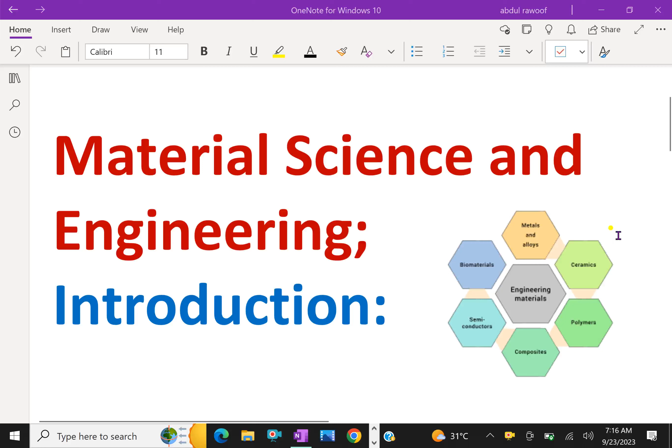In material science and engineering, let us do some introduction. Please take a few moments and reflect on what your life would be like without all of the materials that exist in our modern world. Believe it or not, without these materials, we won't have automobiles, cell phones, computers, internet, aeroplanes, ships, home appliances, furniture, stylish clothes, nutritious food, refrigerators, television, computers, etc. The list goes on continuously.

That's all we need. Virtually every segment of our everyday lives is influenced to one degree or another by materials. Without them, our existence would be much like that of our Stone Age ancestors. In the modern age, these are the very important materials that we need in day-to-day life.

Historically, the development and advancement of societies have been intimately tied to the members' ability to produce and manipulate materials to fill their needs. In fact, early civilizations have been designated by the level of their materials development, that is the Stone Age, Bronze Age, Iron Age.

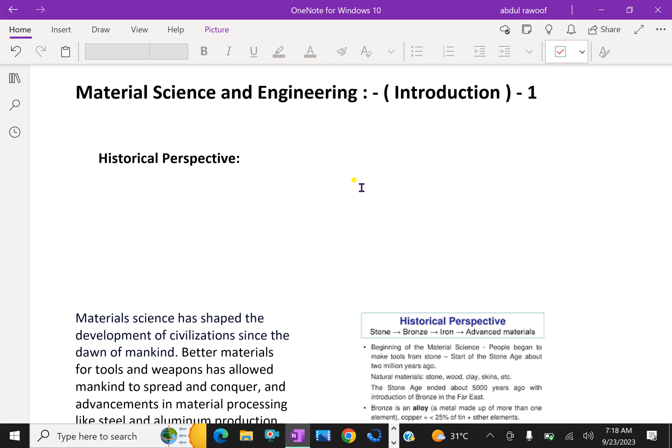Materials science has shaped the development of civilization since the dawn of mankind. Better materials for tools and weapons have allowed mankind to spread and conquer, and advancements in material processing like steel and aluminum production continue to impact society today.

The earliest humans had access to only a very limited number of materials, those that occur naturally: stone, wood, clay, skins, and so on. With time, they discovered techniques for producing materials that had properties superior to those of the natural ones. These new materials included pottery and various metals.

Furthermore, it was discovered that the properties of materials could be altered by heat treatments and by the addition of other substances to improve durability. At this point, materials utilization was totally a selection process that involved deciding from a given, rather limited set of materials the one best suited for an application by virtue of its characteristics.

The development of many technologies that make our existence so comfortable has been intimately associated with the accessibility of suitable materials. An advancement in the understanding of a material type is often the forerunner to the stepwise progression of technology. For example, automobiles would not have been possible without the availability of inexpensive steel or some other comparable substitute.

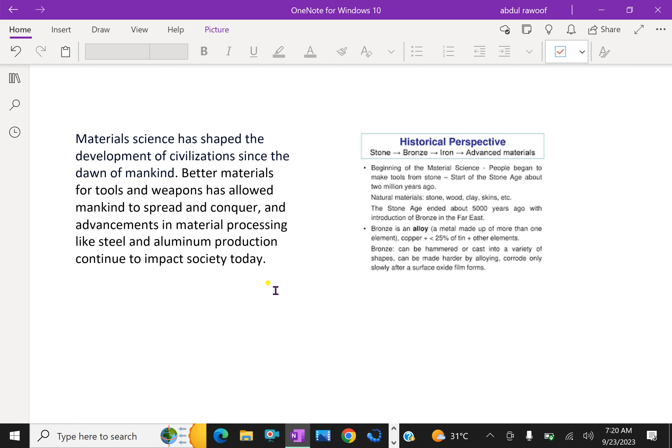Material science and engineering: why we need it. Sometimes it is useful to subdivide the discipline of material science and engineering into material science and material engineering subdisciplines also. Now, before that, we have to study the material structure, some introduction.

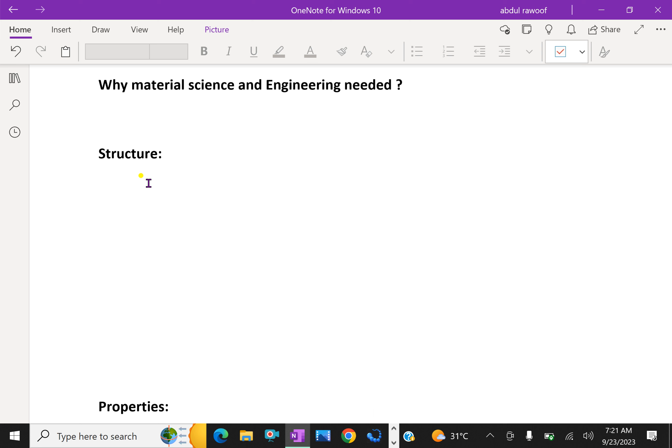In brief, the structure of a material usually relates to the arrangement of its internal components. Structural elements may be classified on the basis of size, and in this regard there are several levels. Subatomic structure: from this point of view, it involves electrons within the individual atoms, their energies, and interaction with the nuclei.

Next, atomic structure. It deals with the organization of atoms to yield molecules or crystals. Nanostructure. What is nanostructure? It deals with aggregates of atoms that form particles, that is nanoparticles, that have nanoscale dimensions less than about 100 nanometers.

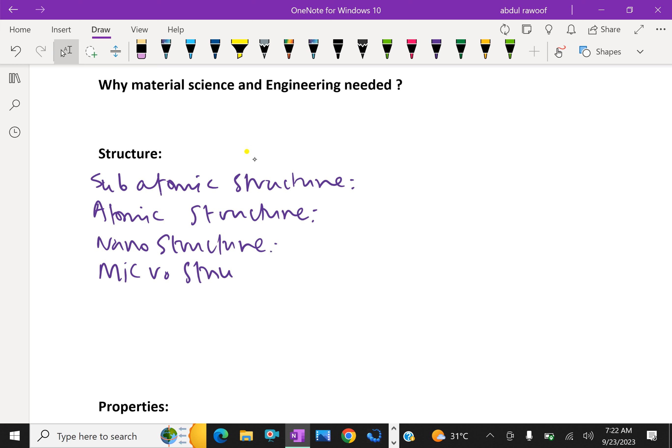Next is microstructure: those structural elements that are subject to direct observation using some type of microscope, structural features having dimensions between 100 nanometers and several millimeters. These are microstructures. Next is macrostructure.

Structural elements that may be viewed with the naked eye, with scale range between several millimeters to the order of meters, that is millimeters to meter sizes. Now, nano is less than 100. Nanostructure is less than 100 nanometers.

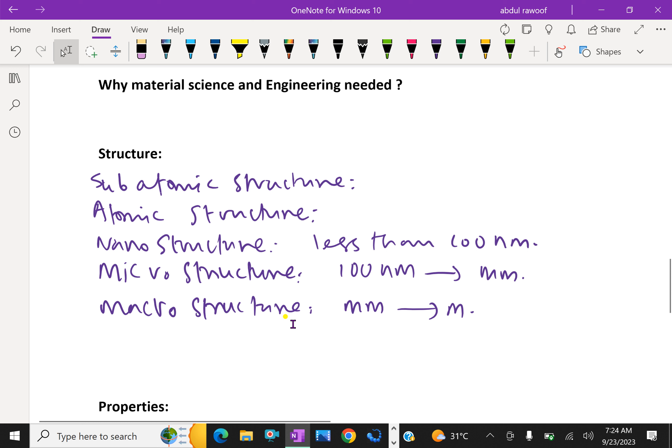Virtually all important properties of solid materials may be grouped into different categories: mechanical, electrical, thermal, magnetic, optical, and some branches. For each, there is a characteristic type of stimulus capable of provoking different responses. First is mechanical properties, which relates deformation to an applied load or force. For example, these include elastic modulus, stiffness, strength, and resistance to fracture of the material.

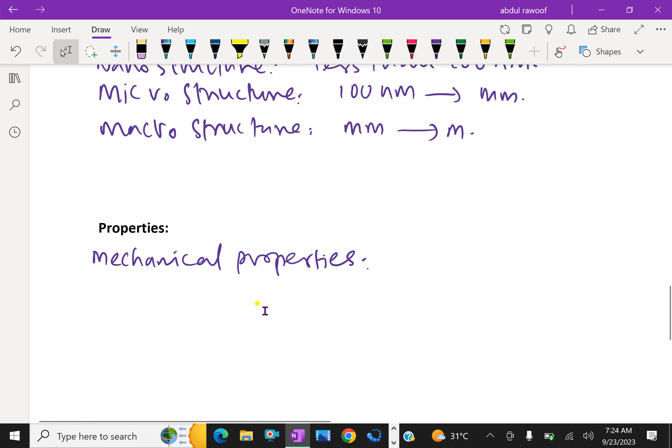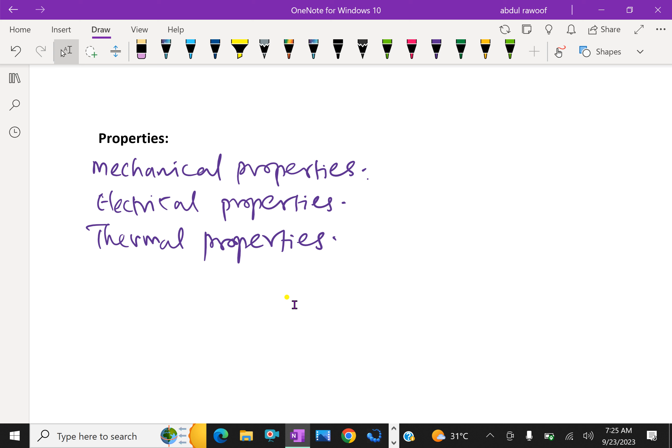That deals with mechanical properties. Next is electrical properties, where the stimulus is an applied electric field; typical properties include electrical conductivity and dielectric constants. It deals with electrical properties of the material. Next is thermal properties, which are related to changes in temperature or temperature gradients across a material. For example, thermal behavior includes thermal expansion and heat capacity of the material.

Magnetic properties: the response of a material to the application of a magnetic field. Common magnetic properties include magnetic susceptibility and magnetization, which deal with magnetic properties of the material. Next is optical properties. The stimulus is electromagnetic or light radiation; index of refraction and reflectivity are representative optical properties of the material.

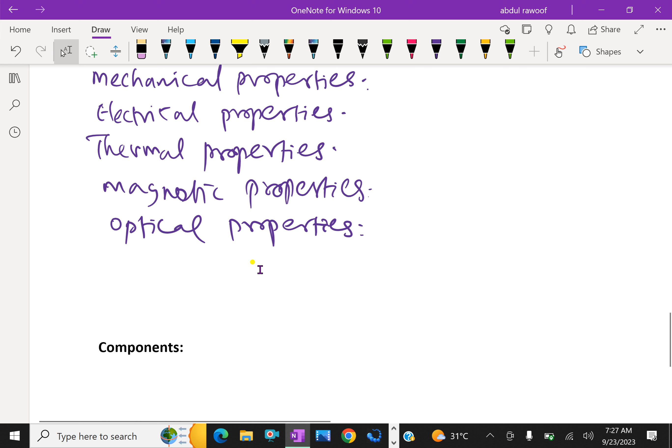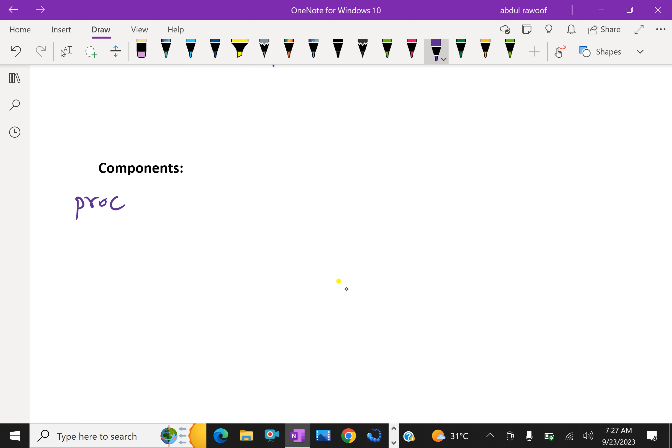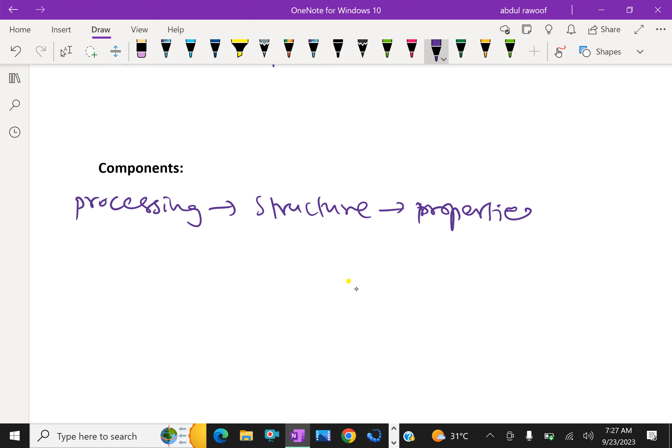In addition to structure and properties, two other important components are involved in the science and engineering of materials, namely processing and performance. With regard to the relationship of these four components, the structure of a material depends on how it is processed. Here, the four components: first processing, then it gives structure, and properties, and performance.

The relationship among processing, structure, properties, and performance of materials may be depicted in linear fashion in the schematic illustration given here. Throughout this text, we draw attention to the relationship among those four components in terms of design, production, and utilization of materials.

Why should we study materials science and engineering? Why do engineers and scientists study materials? Simply because things engineers design are made of materials. Many applied scientists and engineers, for example mechanical, civil, chemical, and electrical engineers, are at one time or another exposed to a design problem involving materials. For example, a transmission gear, the superstructure for a building, oil refinery components, or an integrated circuit chip. These are some needs for engineers to develop.

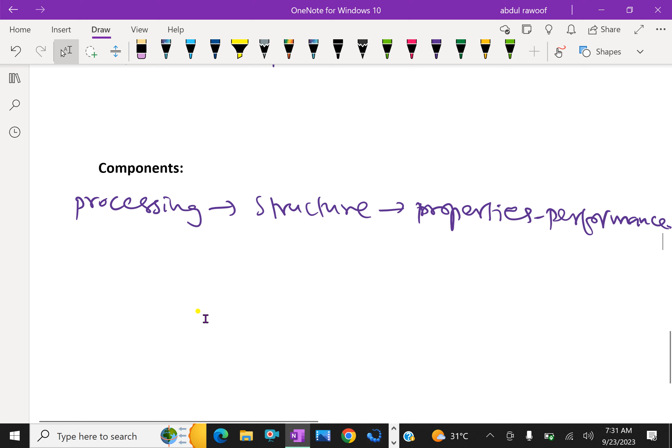The more familiar an engineer or scientist is with the various characteristics and structure-property relationships, as well as the processing techniques of materials, the more proficient and confident he or she will be in making the best material choice based on these criteria. We discussed some introduction about materials science and engineering. In more detail, we'll discuss in further videos.